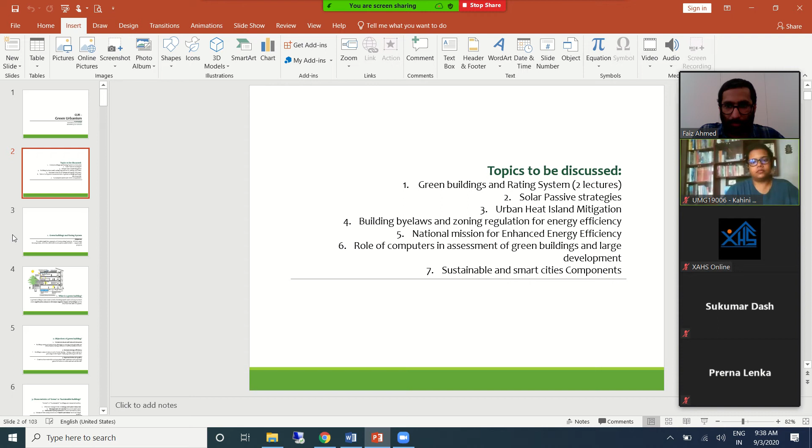Like I said last time, we'll be discussing some aspects of urban green or green urbanism, what are green buildings, and how this works from the perspective of urban scale, and how this rating system has to be understood. We were discussing Griha and LEED in this context, and today we'll see two more rating systems, and then move on to other topics like passive strategies and other interventions impacting the built environment. I have recorded last class's discussion as well, so at the end of the presentation I will share this presentation and both videos in case you need to browse through it. So let us quickly go to the topic.

These things we discussed. Now we'll go into the third component, that is BREEAM. I'm not expecting that you will remember everything we discussed last time, but at least you should have a broad understanding about the objective of this rating system and its main focus. The criteria and scoring system will vary depending on how it emerges, it's not fixed. So if they get a new idea today, they will probably add another criteria or point for it. Those things will keep changing, we can't help it, but we should understand the objective of Griha, how it's different from LEED, and what are the major components discussed in this rating system.

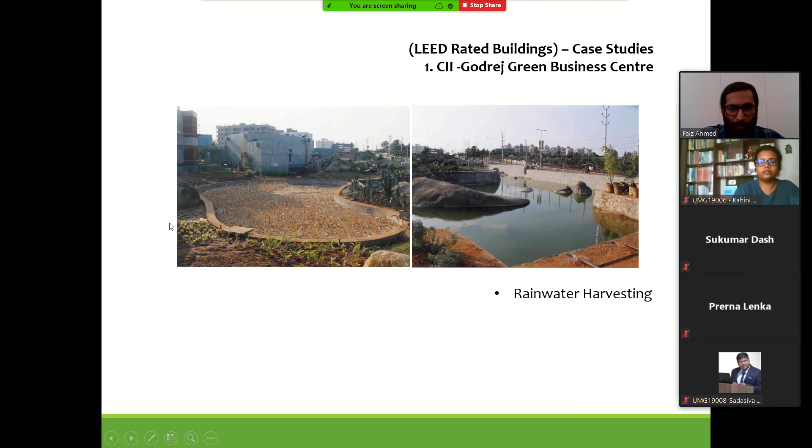So what we'll do today is we will start with BREEAM, and also discuss CASBEE, and we'll see overall what is common in all these four rating systems and what are the most important parameters.

BREEAM is Building Research Establishment Environmental Assessment Method. It's developed in the UK, and it's one of the oldest assessment systems that has been developed. It covers a range of building types, and like we said, for each rating system there are different criteria and modules applicable for buildings, large scale buildings, neighborhoods, or even cities. This is applicable to many different scales of project.

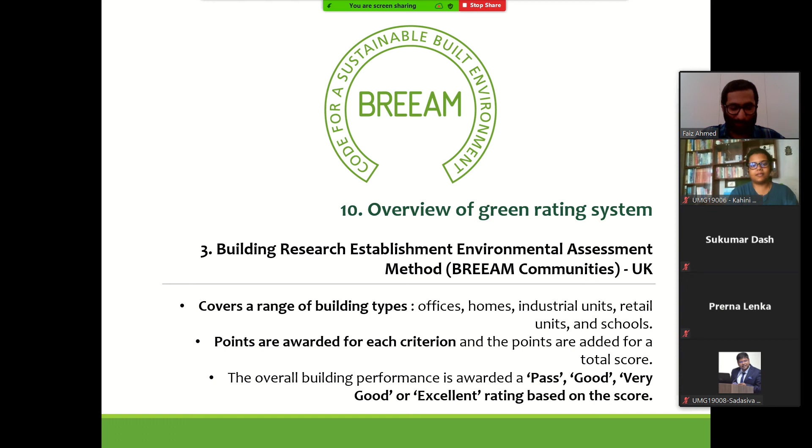Points are awarded for each criteria, and the points are added to total scores based on the performance of buildings on criterion set by the BREEAM agency. It will be assessed, and the overall building performance is awarded in terms of pass, good, very good, excellent rating. Like we have star rating, and we've seen in LEED, what was the system? In LEED also it is a star rating, or what was the system? I forgot, maybe at the end we'll summarize it again.

There are certain specific criteria mentioned in this BREEAM rating system. The major criteria under which the entire building or development will be assessed include management, in terms of overall management of the project. We'll go into sub parameters also, but I'm just highlighting it here so you have a fair understanding. Management of project, then energy - what steps are taken for conservation of energy, energy efficiency, and so on - and water resources.

From land use and ecological perspective, if you see in LEED there was a huge discussion on land use - how it impacts, how the building should be designed to have less impact on the surrounding, and the role of land use in that. Then health and well-being of the occupants - what parameters need to be discussed under this broad heading is also explored here. Then transport, which we've also seen in LEED, smart location was one of the major criteria used. Then material, which is common in all three we've seen so far. Waste, and pollution as well.

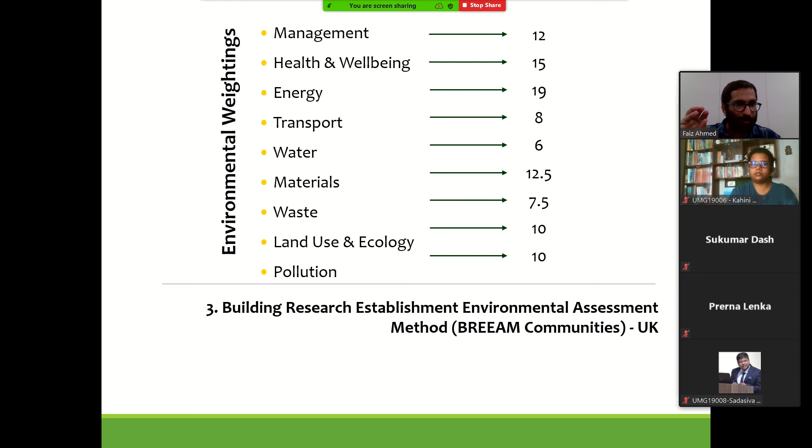Similarly, for health and well-being there is a score. The building can be assessed for a maximum of 15 points, something like that. This kind of weightage is not clearly given in Griha, but it is there actually. Some are optional, some are mandatory points, something like that.

How does it go? These are the parameters that we have already shown: management, health, energy, transport, material, waste, land use, and pollution. These are the major criteria.

It is passed through weightages. Not all criteria have equal weightage. These parameters have specific weightages. For example, like we said, energy has got higher weightage when compared to waste disposal. Accordingly the scores are arrived at for the building, and if they score 30%, this recognition is given.

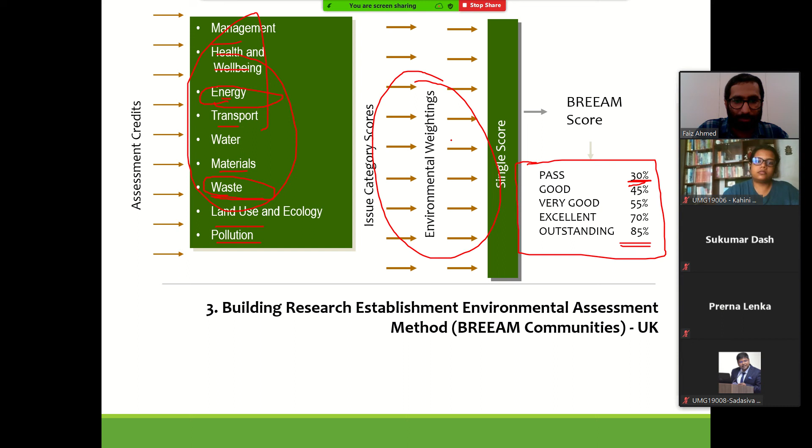It is a certified building. And if 85% of the points are achieved, then you get an outstanding score, something like that. This is not a big science, it's just an assessment criteria. We just have to know that this is how it is done.

We will go into a little bit of detail about what are the sub-criteria mentioned in all the major parameters. So the first one is management: commissioning period and process adopted, monitoring of commissioning, energy use, on-site activities, waste management, and pollution minimization.

This is done in the beginning of the project. So how the process of identifying suitable consultants and the transparency involved in all that is also a part of assessment in this case.

Then health and well-being: adequate ventilation, humidification, presence of controllable blinds, energy efficient lighting, thermal and visual comfort, and noise levels. So this will be assessed from a health and comfort perspective.

Actually, some of these things may be slightly higher, maybe from what you'd call intelligent building or smart building concepts, may be highlighted here. Since this is a UK system, these are devised based on their requirements. I hope you're able to understand what's being discussed: humidification, controllable blinds, energy efficiency, thermal, visual, and comfort.

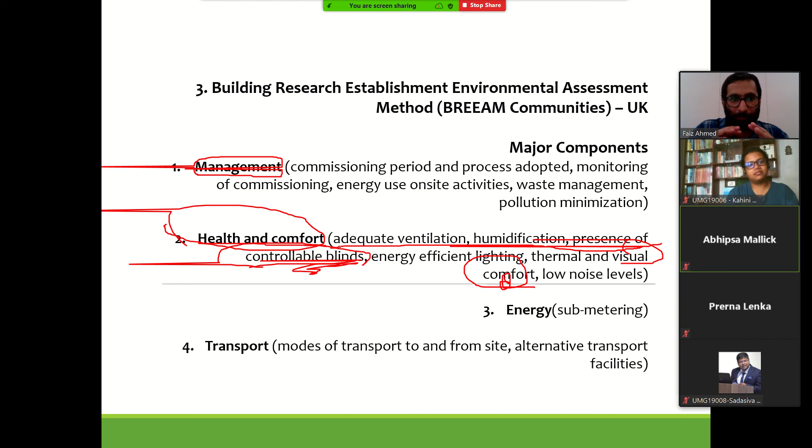If the environment is too quiet, that is also not feasible for us to be in. Let us say I'm here in this cabin, and if there is no sound of this laptop and no sound of this AC running and no noise from outside, I will not be comfortable actually. Our minds are not trained to be too quiet. Sometimes it happens that the building is far inside, and it is too quiet.

So at that time they deliberately create or add sound. For example, you must have seen in big malls or large spaces, music is always being played. That's one example of sound, white noise - deliberately creating sound so that we don't feel discomfort. That's also one of the things we should keep in mind.

Of course, energy. Energy and sub-metering is given here, actually that means at unit level. For example, from an energy efficiency perspective, people are not aware how much energy they consume for lighting, how much energy they consume for, let's say, if you have induction at home, how much you use it for cooking, how much you use it for water heating, and so on.

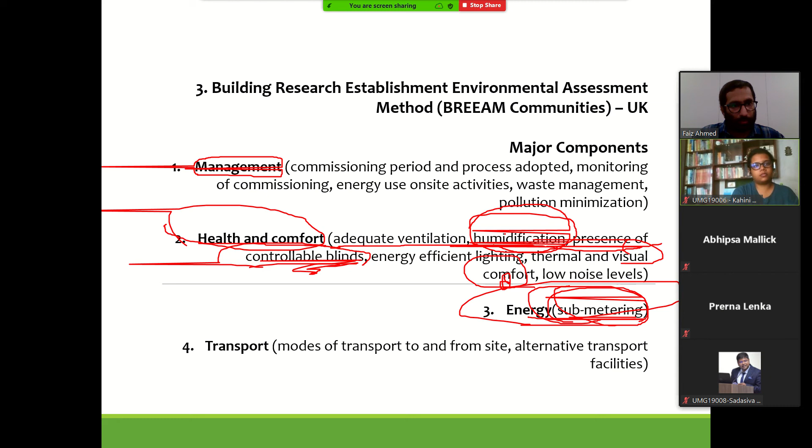Similarly, we have devices called humidifiers that add moisture to air. For example, the air cooler is also one device that adds moisture to air, which we can take as an example of a humidifier. When the air becomes too dry and saturated, that is also a problem for us - we'll have cough, dry throat, and all that. So we need to bring in some kind of moisture into the room, and a humidifier will help in bringing that.

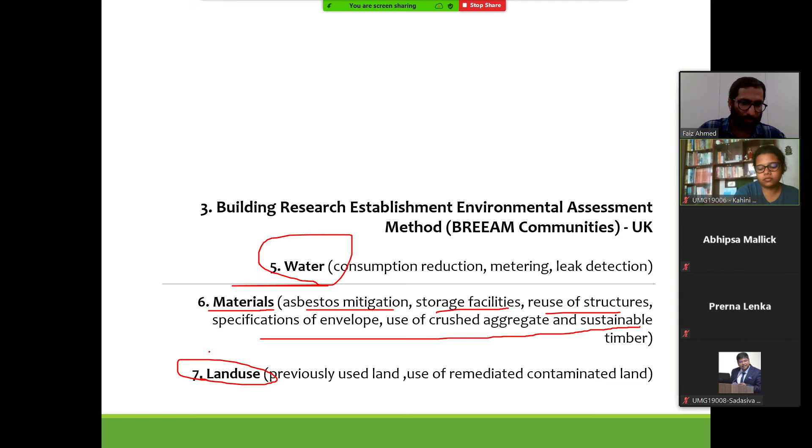Other components include water, and these are common things in all the rating systems. Materials - what kind of materials are used for mitigation, storage facility, reuse of structures, envelope design, all that - right from wall to roof, insulation, and so on. And of course, land use is also discussed, which is one of the important parameters in deciding a project.

Ecology - I think this was also discussed in other cases. Before selecting a site, we should do assessment, something called sensitivity analysis, where the land is assessed from an environmental perspective. And if you remember, in other systems we saw there are higher points for doing infill development, doing it on brownfield development. So these things are again discussed here.

Pollution - leakage system, on-site treatment, local renewable energy sources, lighting pollution design, avoiding use of ozone depletion materials, and so on and so forth.

Lighting pollution - can you give an example? Do you understand what lighting pollution is? How do we assess lighting pollution? We are talking about buildings. Too much light is also not required, and too much light will create glare, probably from an office design perspective. We don't need too much lighting. There is a prescribed lux level given for each activity - if we meet that requirement, that's sufficient. If we create more lighting, then we'll have more issues. Lighting pollution at that level will also be assessed. In fact, this is common in all the parameters.

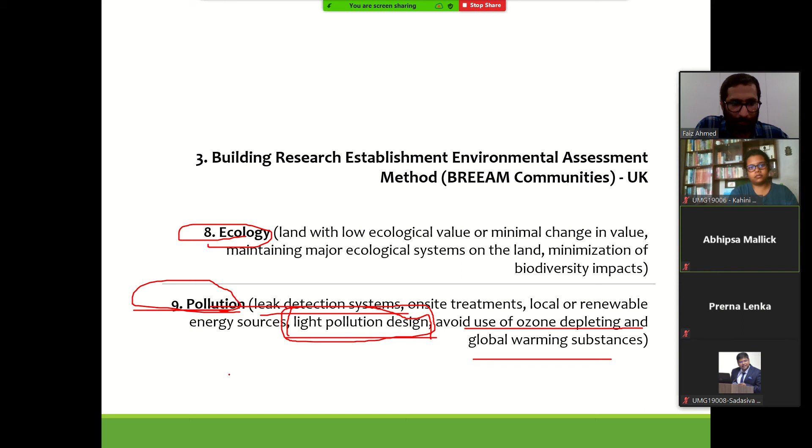Yes sir, yes, yes. Sorry. No, your voice is not clear, your voice is breaking actually. Yeah, yeah, can you speak? Say it again please. Yes, yes, yes, of course, that's what I'm also saying. Yeah, we can consider.

In fact, there are specific - I think this is not our subject, but just to give you a hint - lighting pollution can be looked into three ways. One is, of course, the amount of light coming from installed fixtures, street lights, and so on, and also the kind of barriers we use in streets. For example, if we have a two-lane street and vehicles are passing in both ways, we have a median.

If you have observed, these medians are treated through landscaping or through barriers. Why do we do that? Of course, one objective is so vehicles don't cross from one lane to another. The other objective is to avoid glare, the excess light from one lane disturbing vehicles on the other lane. Similarly, lighting pollution can also be discussed from a glare perspective - too much lighting.

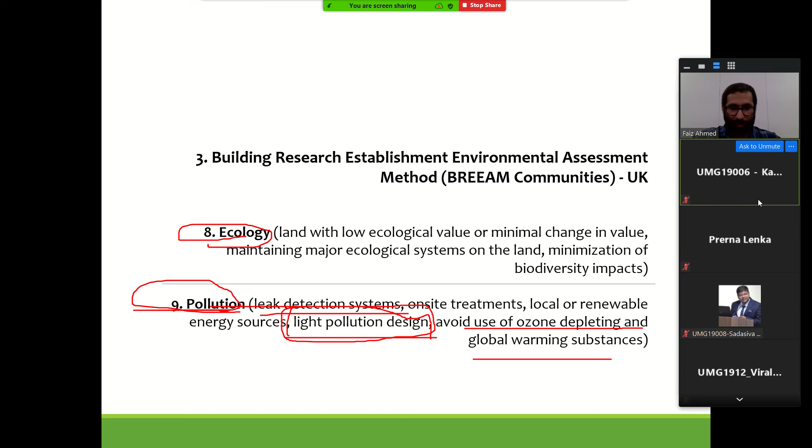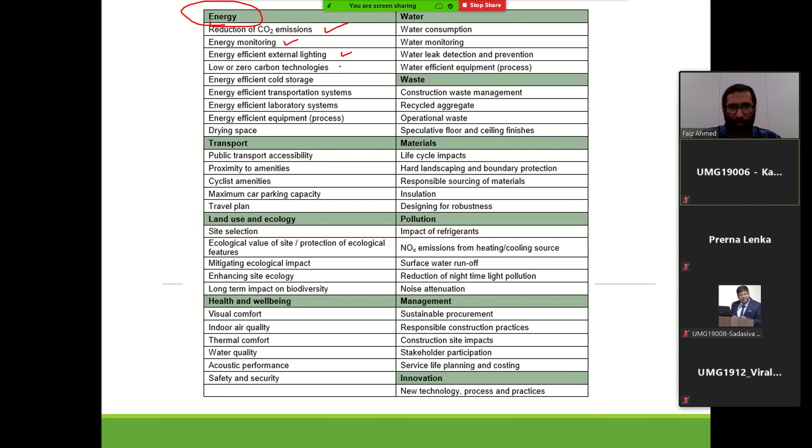So in summary, for example, under energy we have assessment for reduction of carbon dioxide, energy monitoring, energy efficient external lighting, low or zero carbon technologies, energy efficient cold storage, energy efficient transport system, laboratory system, equipment, drying space and so on. So under major criteria, there are specific sub-criteria mentioned in all these things.

All these things will be measured. For example, in health and well-being we have visual comfort, like I said. It's about lighting, both artificial and natural, indoor air quality, thermal comfort, water quality, acoustic. Acoustic is the sound environment inside a building. This is also actually a less spoken or less researched subject. Sound pollution - how do we assess it? Can we map the soundscape of a park?

There is one of my PhD scholars who has just submitted her PhD. Her work is on mapping soundscape - how do we define the soundscape of a park? How do we define the built environment, what are its characteristics? We can model it. Can we model the soundscape of a park or the soundscape of this room, and assess how sound impacts the end user?

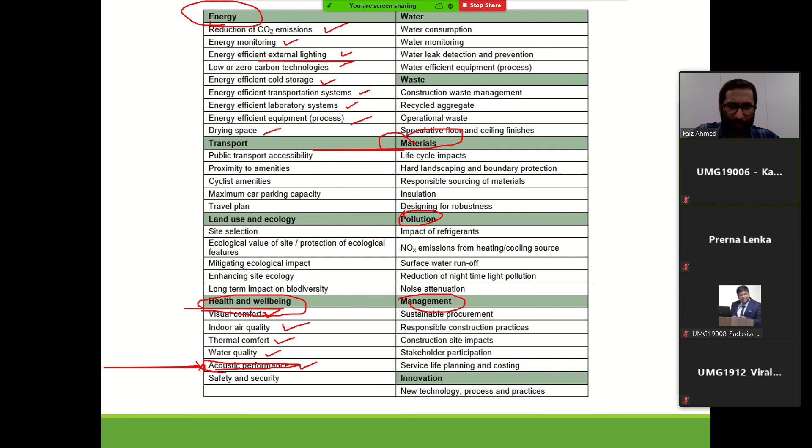So now there are a lot of advancements. So many things have been added into the assessment criteria. And of course, these are not qualitative assessments - many of the parameters and sub-parameters are quantitative assessments.

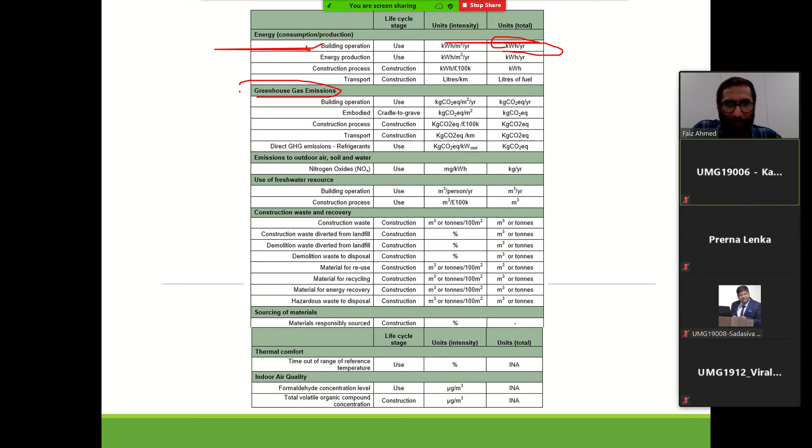For example, let's say building operation - how much kilowatt hour per year it uses, this is quantified. In terms of numbers, it is quantified. It's not a qualitative assessment, it's all quantitative assessment. For different parameters and aspects, different units are given, and how it has to be measured and recorded. This is an indicative assessment table for BREEAM.

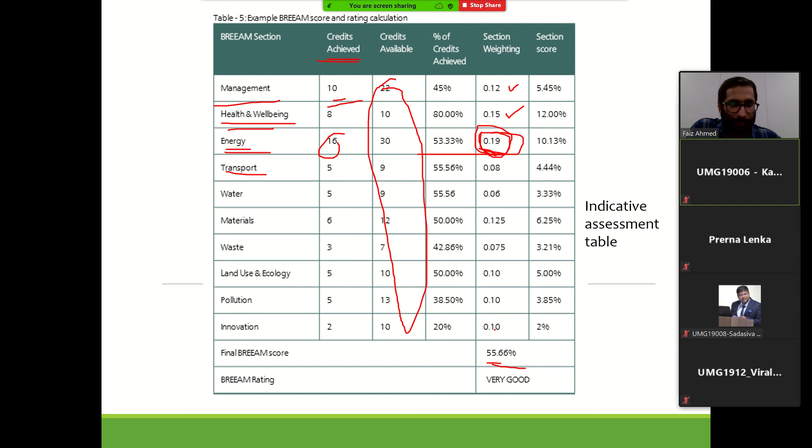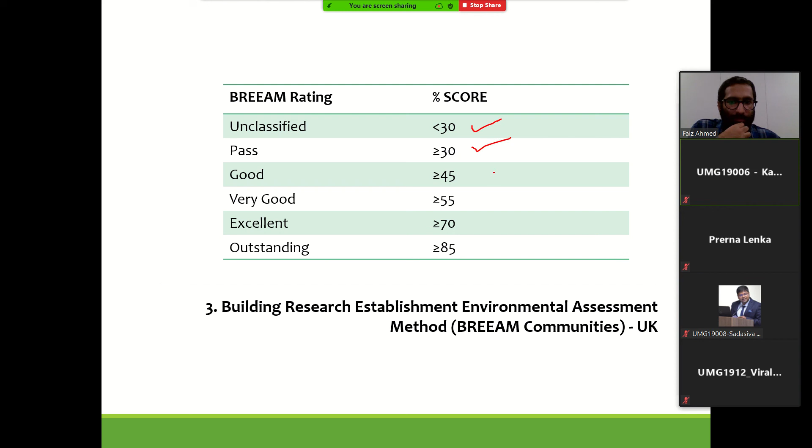And how is it assessed? Unclassified, just certified building if the percentage is less than 30, and pass, and very good, and so on and so forth, depending on the scores achieved.

And this is interesting - the BREEAM is interesting because it has been there for quite a long time. I think it is from 1990. So things have been refined, much refined, and clear objectives have been set. So there are certain things which are pre-design assessment.

For example, let's say appraisal - appraisal of the project and the objectives and so on and so forth. Design brief, in the sense what is the expectation of the client, and what is the need of that expected outcome of the project. So that is assessed, pre-assessed at this stage.

And there is something called design stage assessment, where the actual concept of the project, design development, and technical details of the proposals are assessed or evolved over a period of time.

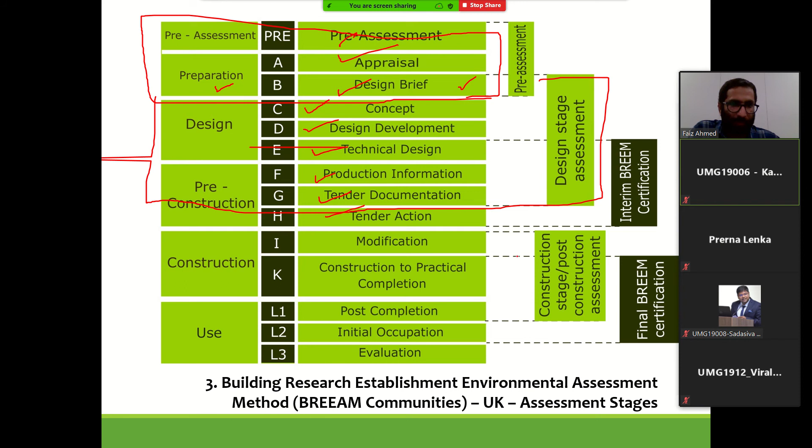And then pre-construction assessment is also done - production of information, tender documents, and actions regarding the tender document, all that has to be done. At this stage itself, an interim assessment or certification is done by BREEAM. So pre-assessment and design stage assessment - till here itself the project is assessed and an interim certificate is given.

And then during construction, what are the changes that have been brought in the actual construction, and other issues related to construction, up to practical completion - how much is actually built on site, how much deviation has occurred from the project - all that will be monitored and documented.

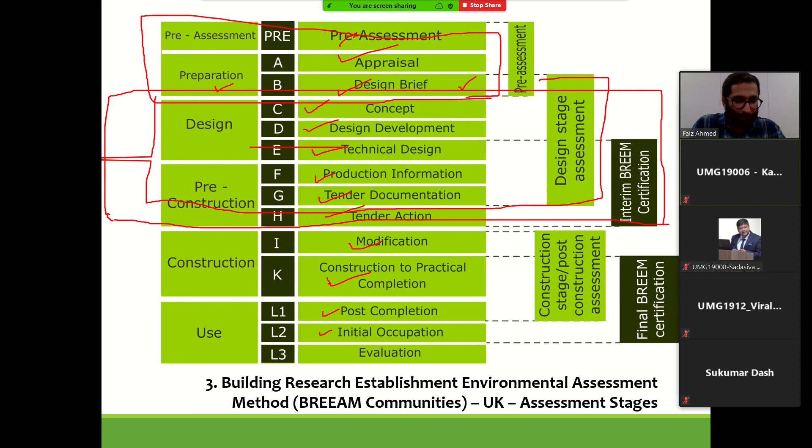There will be post-assessment as well, and final rating will be given based on the assessment. Post occupancy evaluation is one of the most important criteria we should keep in mind. It's not that this is only discussed at the design stage. After construction, the project is assessed to check how much actual deviation has occurred, or whether it is really performing the way it is supposed to. Otherwise, whatever the client or client's consultant submits as a performance report will just act as evidence for the building's performance, which is not actually the case.

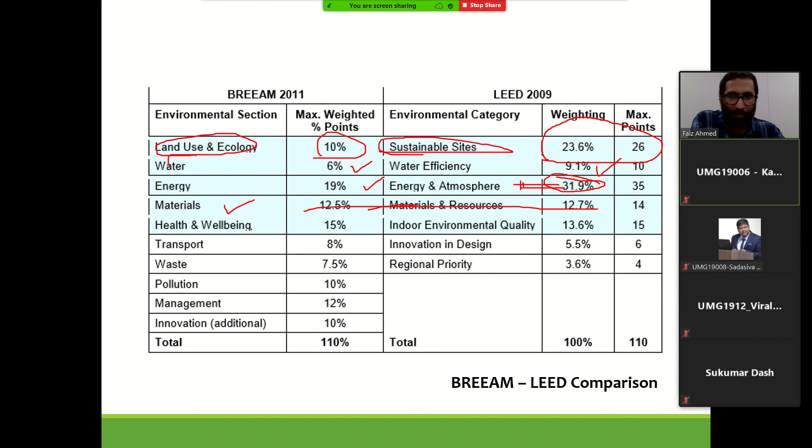If you see the comparison, land use ecology in BREEAM is there, and there's something called sustainable sites. If you see the weightage, 10% is given in BREEAM, whereas we have seen extensive importance given to land use elsewhere. Water efficiency is 6% in one and 9% weightage in the other. Energy is given 19% here, whereas 31% is focused on energy in the other system. So this is a huge difference, that's why a lot of new technological development has occurred from this perspective. Material gets almost the same weightage in both cases. Health and well-being is also almost the same weightage. Then transport, and then we have wastage.

There are other things discussed in BREEAM which are actually indirectly assessed inside it, but not explicitly assessed. For example, pollution management of the project and innovation are not actually explicitly discussed here.

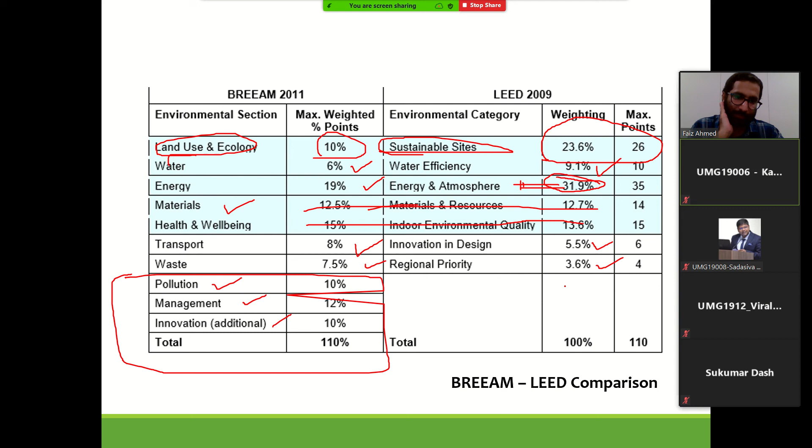I have not put any case study for BREEAM because so many things can be covered. I have given a link where you can go and see some case studies from the official BREEAM site itself, to look at how BREEAM works and how assessment is carried out.

That was BREEAM, and now we see the last rating system, CASBEE. Please remember BREEAM is from the UK. You may ask why these things are important. Suppose you want to work in the UK, Japan, the US, or the Middle East - if you are interested in this subject and want to be a consultant in these lines, you need to master the specific rating system so you are aware of the kind of rating system in practice in that particular locality, and you will also be certified.

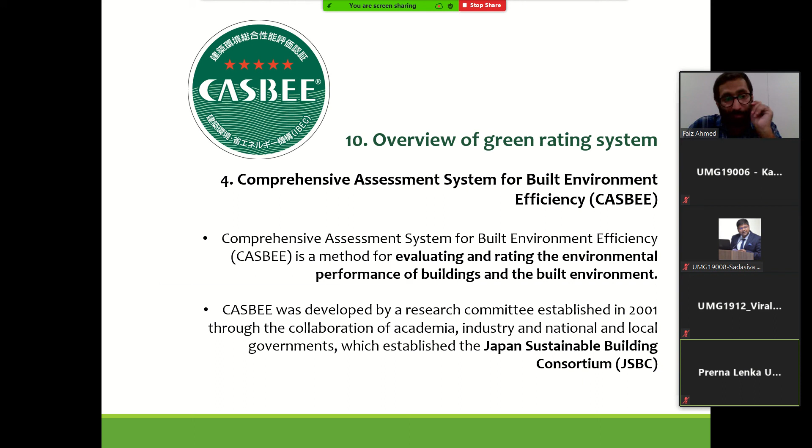The last rating system we will discuss under this topic is CASBEE, which is Comprehensive Assessment System for Built Environment Efficiency. CASBEE is a method for evaluating and rating the environmental performance of buildings and the built environment. Two words are mentioned here: evaluating or rating the environmental performance of the building and the built environment. So far what we have seen is exclusively the building alone, and maybe to some side.

Here, specific assessment will be done on how the building is actually impacting the immediate surroundings, and the performance of the building - both are equally important here.

CASBEE was developed by a research committee established in 2001 through collaboration of academia, industry, and national and local governments, which established the Japan Sustainable Building Consortium, JSBC. I have put up one very interesting case study of a building rated under CASBEE. All this information you can find through JSBC - online you can log in and find out which buildings are rated, how it is rated, what the parameters are, and so on and so forth.

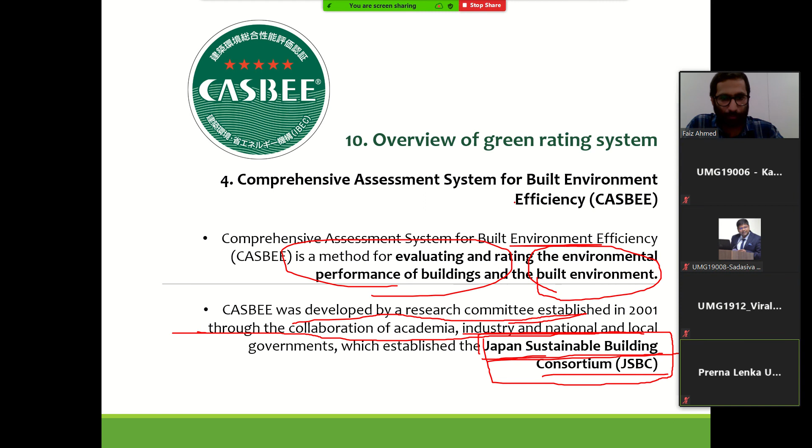CASBEE is divided into four assessment tools. The first assessment tool is about pre-design, the second is about new construction, the third is about existing building, and the fourth is about renovation. It's given part by part.

If the project has to be assessed for pre-design, there's a specific tool, and I think there is one supplementary Excel file where you have to feed the information to generate the results.

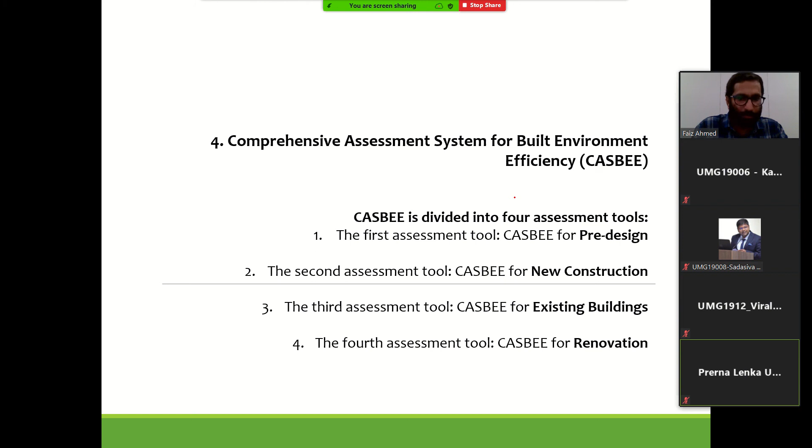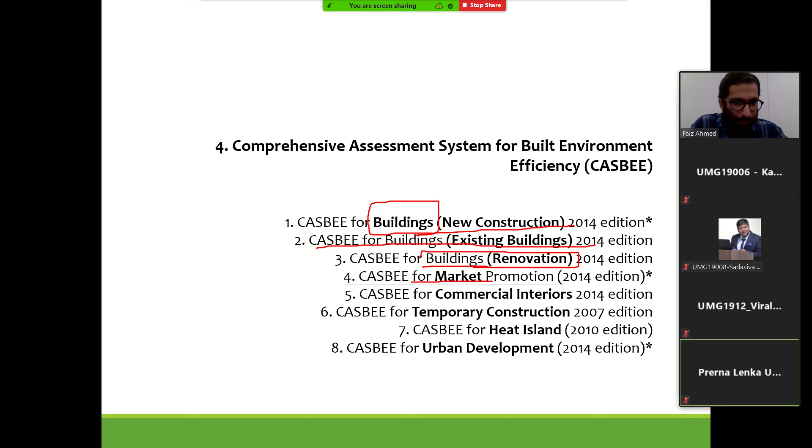For each stage or category there is one specific tool given, and unlike other tools which generally say this tool is applicable for small scale projects, large scale projects, or commercial projects, here specific building typology has been evolved. For example, CASBEE for new construction is generic, CASBEE for existing building, CASBEE for renovation, CASBEE tool for market, for commercial interiors, for temporary construction, for heat island, for urban development, for cities - this is evolving actually, it's not holistic.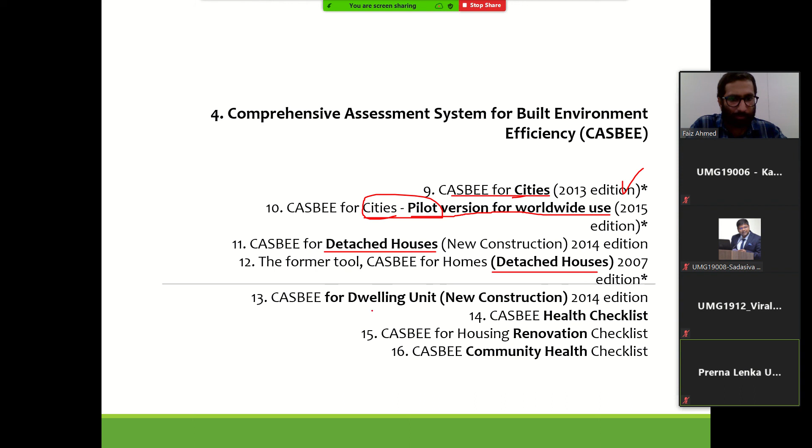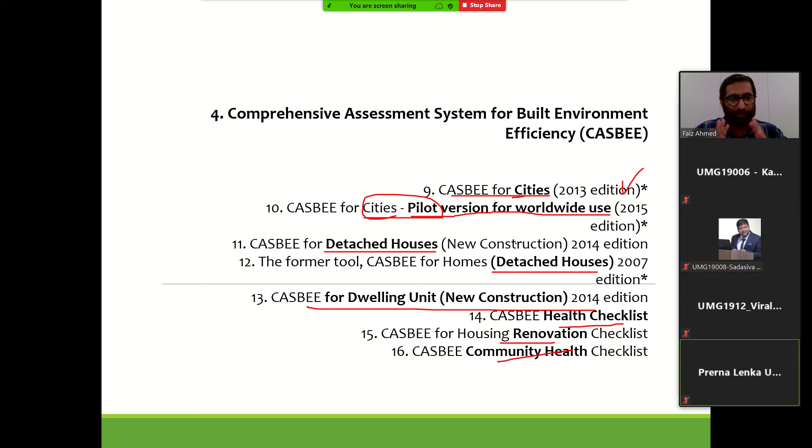Pilot version for worldwide use is also for cities, there has been evolving actually, and CASBEE for detached house, and there was one old tool also, CASBEE for new construction of dwellings, health check, renovation, community. So depending on the typology of the project and the use, specific tools are there, so that to have some more explicit assessment about the performance of the building.

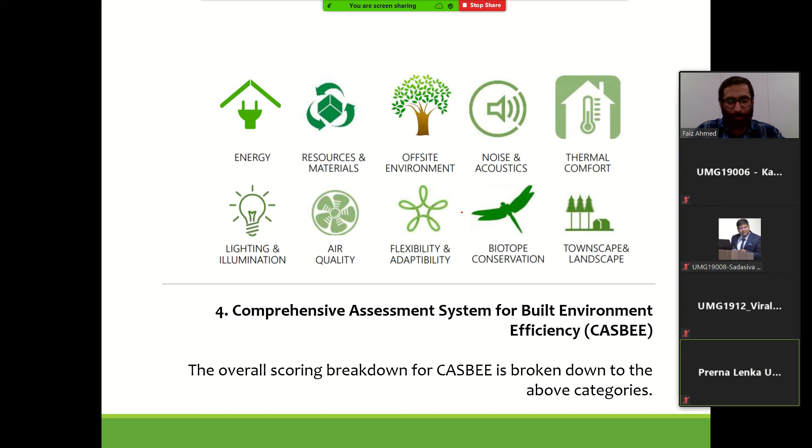So how is it assessed? Like other rating systems, this also assesses parameters including energy, resource and materials, and then we have offsite environment. These are some of the new things we will discuss in little detail how it is done. Noise and acoustics, thermal comfort, lighting and illumination level, air quality, flexibility and adaptability.

Biotope conservation, so conservation of fauna and of course flora as well, townscape and landscape. The overall scoring is done based on these critical parameters.

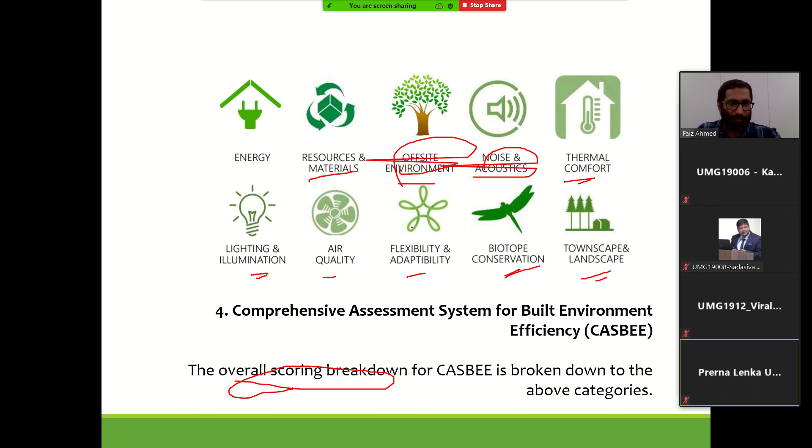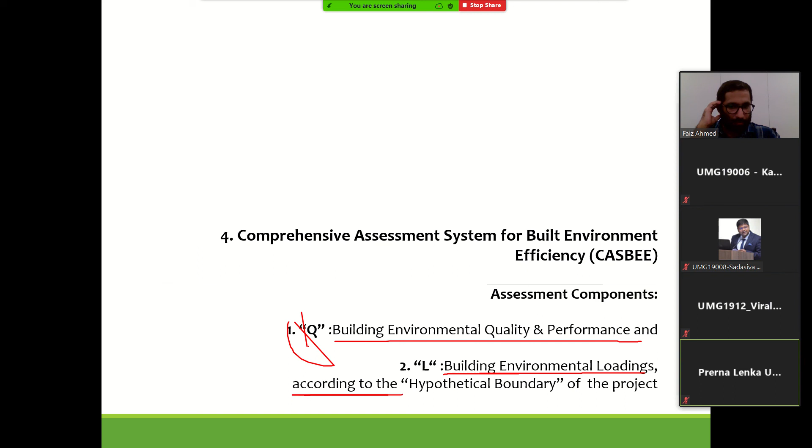So assessment is actually divided into two components. One is called Q, where building environmental quality and performance is one component. Then building environmental loading, according to a hypothetical boundary of project. Let me explain through this diagram.

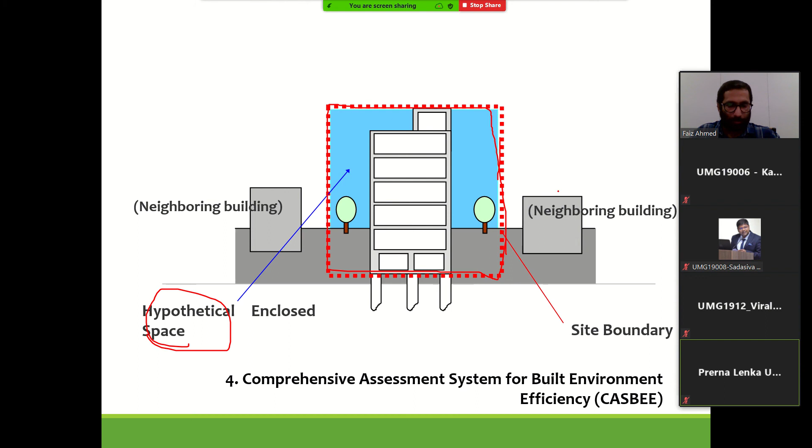Let us assume that this is the building that we are analyzing, and this is the site extent of this building, which they define as the building's environment, immediate environment, hypothetical space enclosing the building, and these are its neighboring buildings. Q is the assessment category as a positive impact inside the boundary.

Because of this, and also because of the interventions at the site level, the quality of this environment is defined, what are the positive aspects of putting this building in place, and the negative impact is also assessed. For example, emission of air pollutants, noise, heat, etc., soil, water and waste pollutants outside the site, resource consumption and CO2 emission and so on.

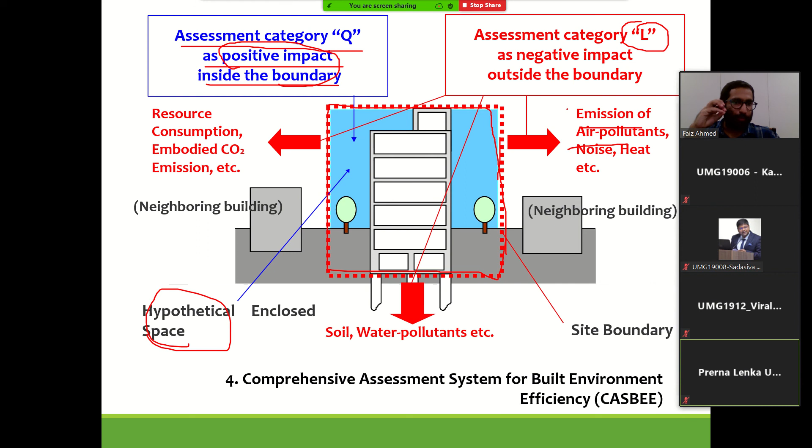All these are termed as L, the negative impact of putting this building into place. So to analyze and understand this: because of this building, what is the positive environment created within this site, within this micro environment, is one component. The negative impact of this building on outside the site, these are outside the site.

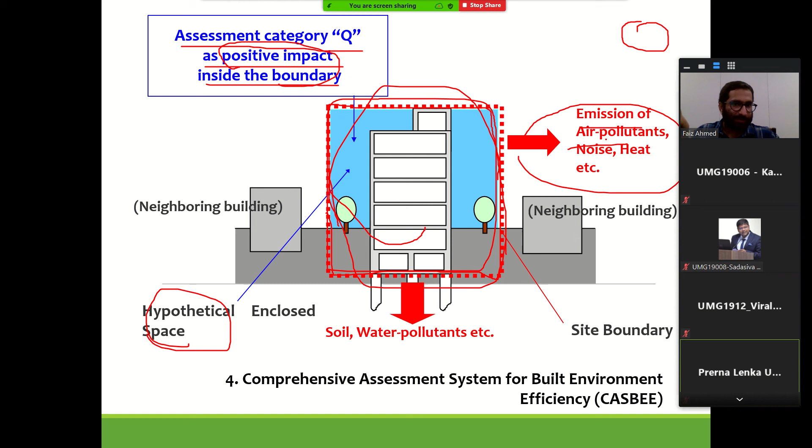The buildings are not exclusive, right? It will have an impact on the other case as well. For example, in fact, we have been discussing that green buildings will have a better performance, less impact on the surrounding, or less impact on the environment.

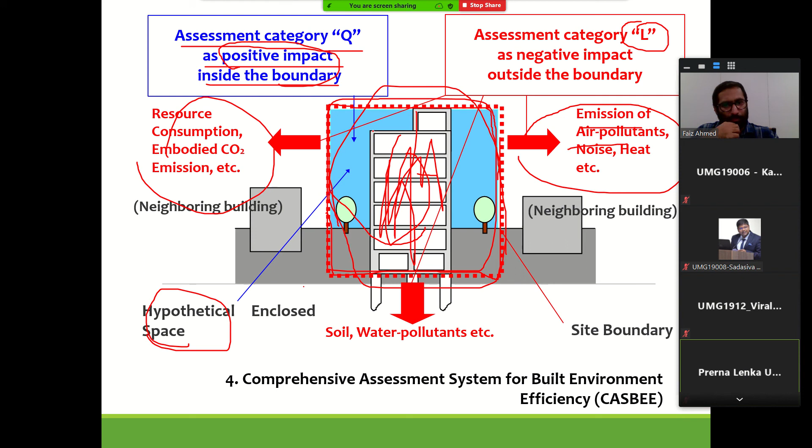There was one study done in our campus. We tried to assess the negative impact of this. Let us assume that this is a green building, designed as a green building, and we were trying to assess the negative impact of this green building on its immediate surrounding, similar to this.

Any building will have an impact, but it should be less, it should be minimum. That's the whole intent. We cannot have zero impact buildings. There's nothing like that. As soon as we build something, we are disturbing the natural fabric. But the intent is how do we bring down the impact, which is what we are all discussing now from the lens of sustainability or green urbanism and so on.

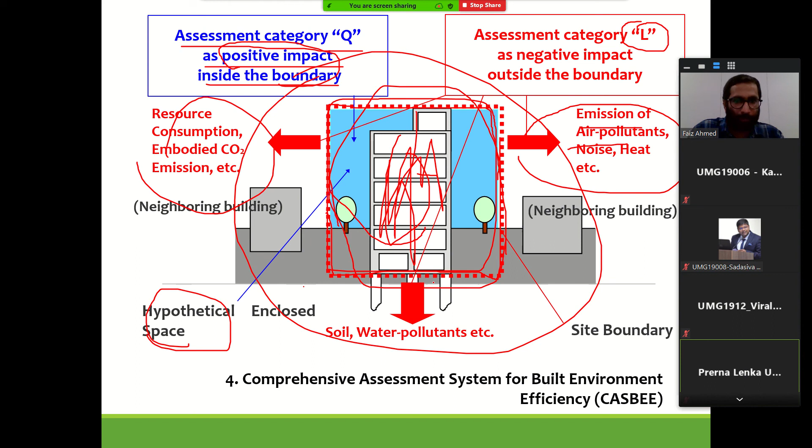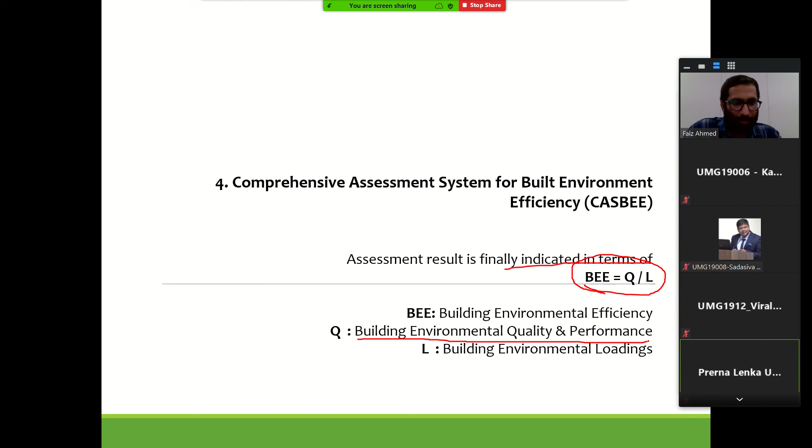So the assessment result is finally indicated in terms of building environmental efficiency, which is equal to building environmental quality performance divided by building environmental loading. This is assessed from majorly 4 aspects: energy efficiency, resource efficiency, local environment and indoor environment. The scorecard is arrived at like this.

Project description is given, and each assessment shows how each parameter is performing, and what score the particular building has achieved. All that will be shown in this automated tool, and how much score is generated.

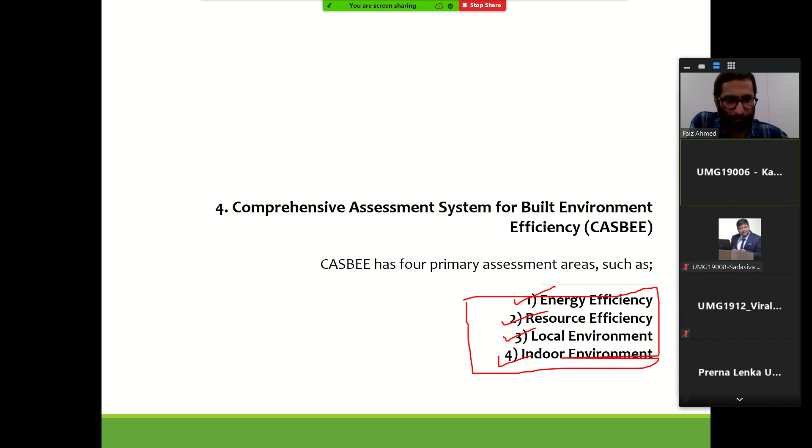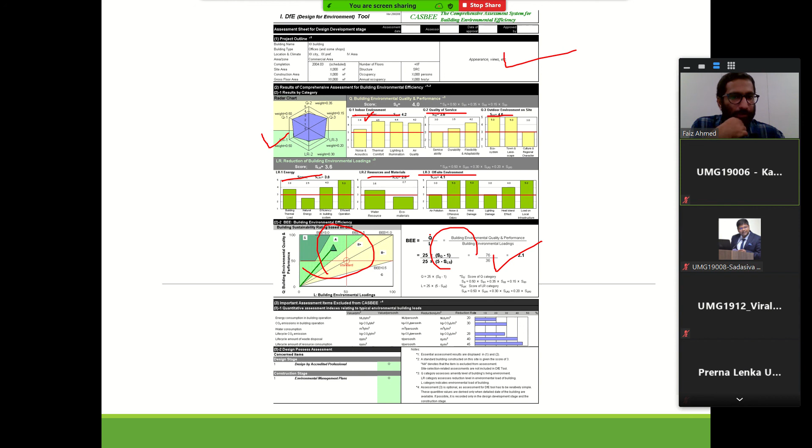These are auto-generated ones. So once we feed the information, we will be able to generate this kind of report. This will be the final scorecard or sheet, and based on this, the assessment is given.

I have put one case study for this because I felt this is very interesting, and there are new concepts being discussed here. So probably this will lead to the next topic that we'll be discussing in the next class. I thought we can have a brief introduction on this so that we can proceed and take the discussion further in the next class as well. So this is one research institute in Tokyo.

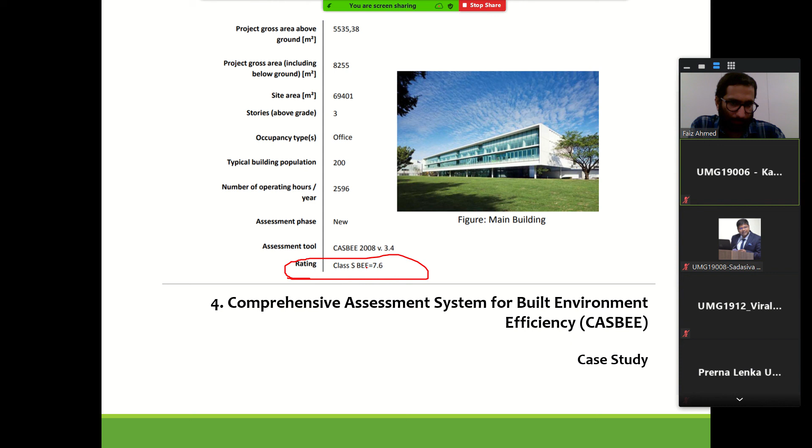And it is CASBEE rated building, and we'll see what are the major initiatives taken in this particular project, and how it is assessed.

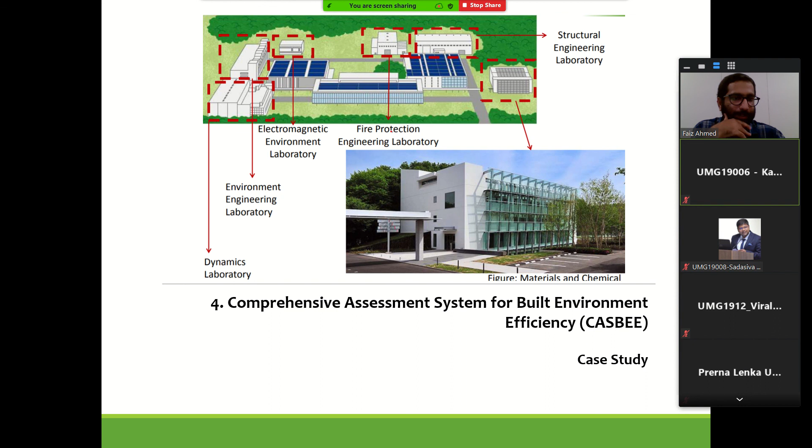So actually this is a large complex building with multiple buildings. Some of the important criteria, initiatives, or strategies used in this building is the ecological roof system.

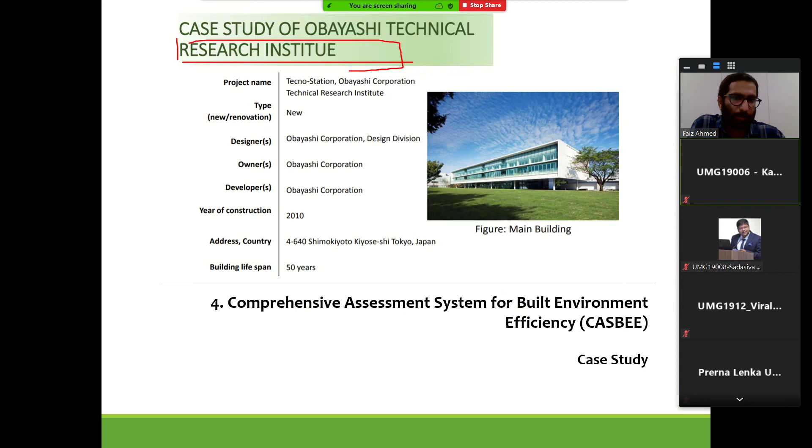This is how we compile the assessment report. It is not that you just feed in numbers and the assessment is done. No, each component has to be assessed in a specific manner, and details have to be developed. For example, let us say for on-site power generation, what are the criteria, what are the initiatives that have been taken?

Here, solar panels are installed on the entire roof of the system for generating electricity, for running the building.

Natural light by reflection of indirect lighting. Specific designs are done so that the light does not directly enter the building; we have reflected light. Light falls on the surface and then we get reflected lights. This is direct light, where the light is directly passing into the working environment. At the same time we have reflected lights coming in. These are specially designed, and you can see the sections as well, at specific modules this has been done, so that the lighting is also taken care of.

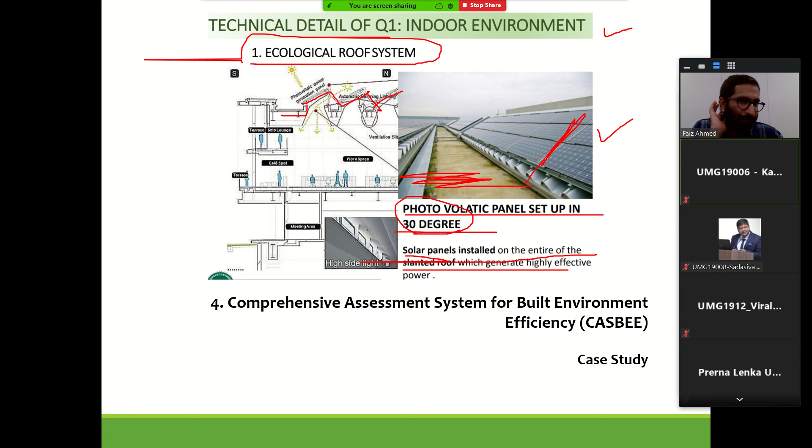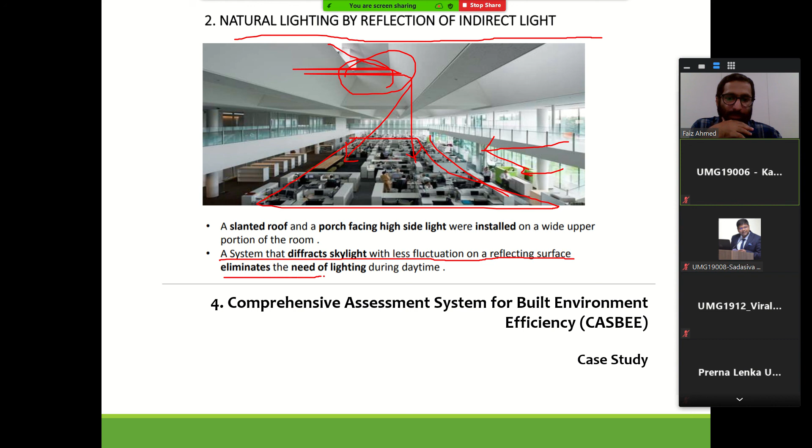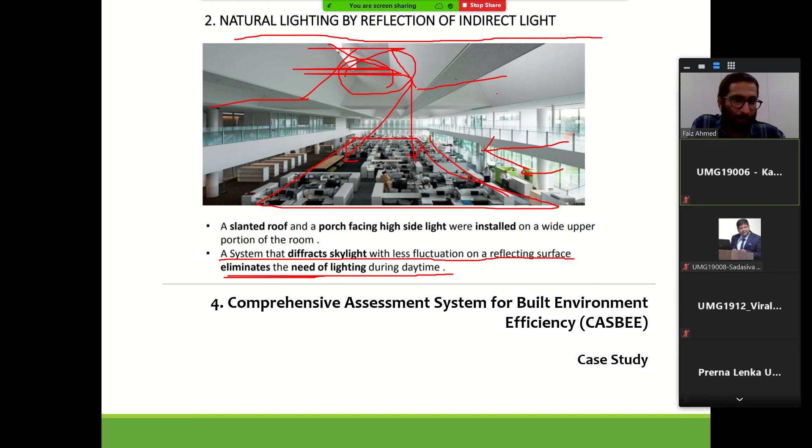At the same time, the solar panels are not laid flat like this. They have to be laid at a specific angle based on the latitude and longitude, based on the location of the project. That has been taken care of, and integrated with the daylighting system as well. This is a system that diffracts skylight with less fluctuation on the reflecting surface, eliminating the need for lighting during daytime. This is one initiative, and of course this has to come from the building side. No consultant will give this idea, only an architect can do this.

The second one is the peri-buffer system. Peri-buffer system is, for example, certain buffers you can say balconies are created. Why do we do that? So that the heat is reduced or minimized and absorbed in this area, so that lesser heat enters into the actual working area. A thermal buffer zone established around the window reduces the air conditioning load.

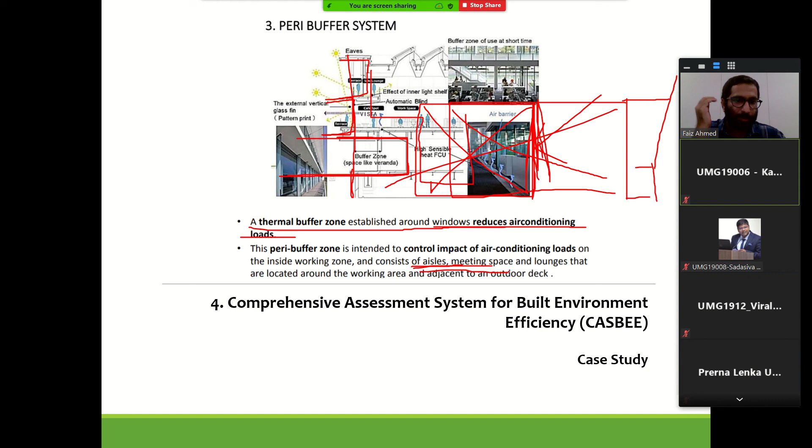Suppose the building is like this, and this is the external wall. We get direct sunlight, and the amount of air conditioning required to cool this space will be much higher than if you have a buffer. You have a buffer and you reduce the heat coming in, and then this is your heating or cooling area. This area may require a little lesser cooling load than having an external direct wall. So there are specific corridors and aisles created around the building, so that the cooling energy demand is reduced by design. That's one thing that has been done.

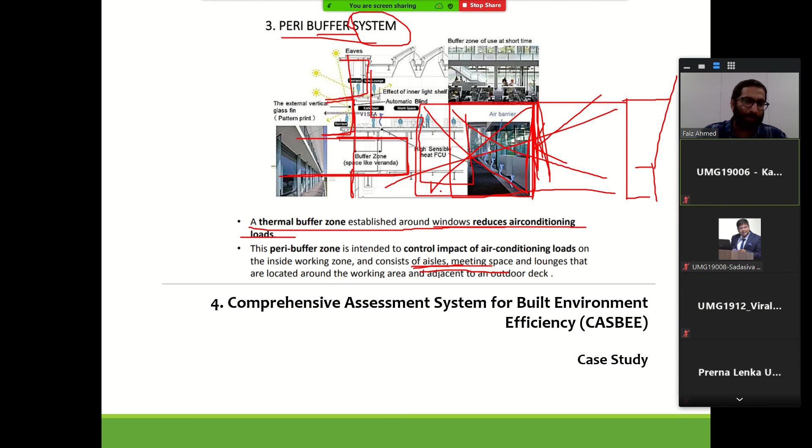The peri-buffer system is used. There is no system here actually; system in a sense, the design of the layouts, how it is done.

Then, displacement natural ventilation system. We've also seen the technique for getting daylight into the space. At the same time, in HVAC systems you must have read about displacement ventilation. Displacement ventilation is where you have X amount of air in this space that has to be replaced by Y amount of air, and how much time it takes for the system to do this depends on the efficiency of the system in place.

So when outside air meets the predetermined condition, the air conditioner is stopped automatically, and the air is discharged from the high side light on the upper building. If you understand how the physics of heat works, the hot air is above. Let us assume this is a building section, and we have an X volume of air in this room.

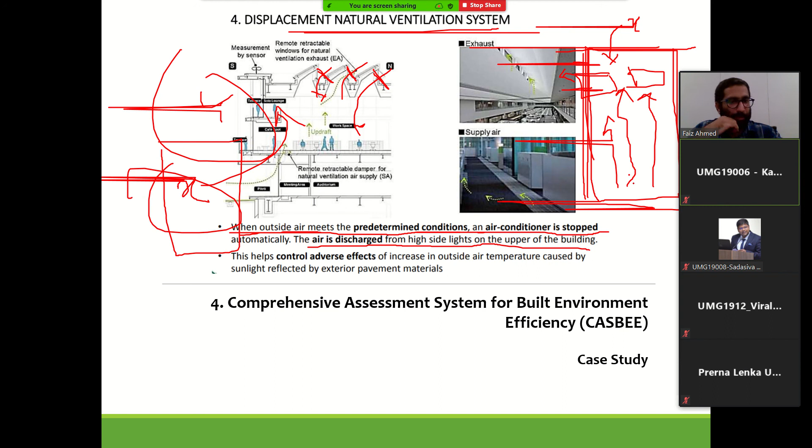The air will be different. To put things simply, hot air rises up - this is basic physics. If you have seen old houses in warm and humid climates, in most Indian cases, you will see a clerestory window on top, maybe a small ventilator at every level, higher up. That is basic science: hot air rises and finds vents to leave the building.

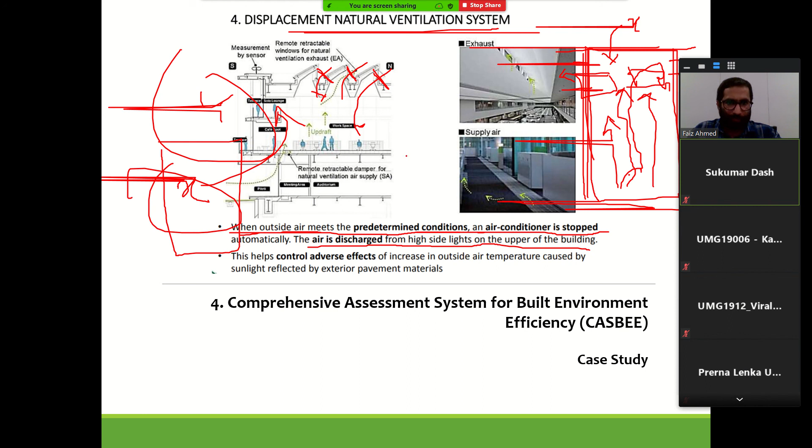So that same concept is used here to displace the air. They have also used other sensors - motion sensors and occupant sensors - for example, task-based lighting, task-based cooling systems, or sensor-based cooling systems. Also personalized air conditioning using radiative, convective, task-based systems. These are very high-level technological interventions used in the building.

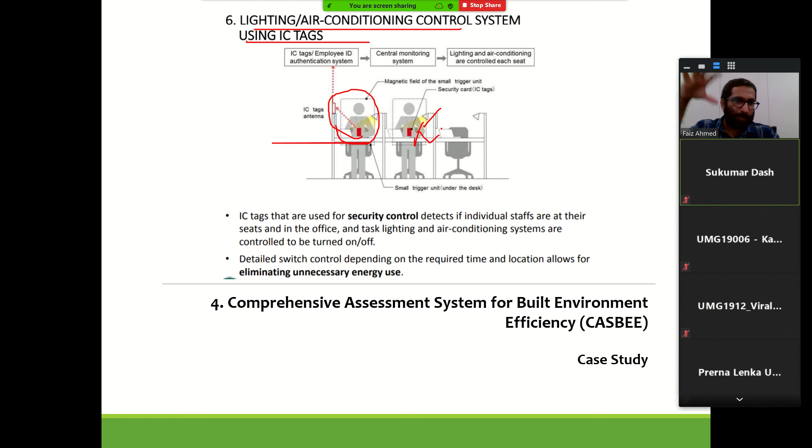Lighting, again, is now fairly common - you have probably seen in cinema halls and shopping areas that lights turn on only if you are there. So sensor-based lighting, smart lighting systems are used. In fact, they have gone further to task-based lighting systems - the same concept used at macro level has been applied at a very detailed micro level as well.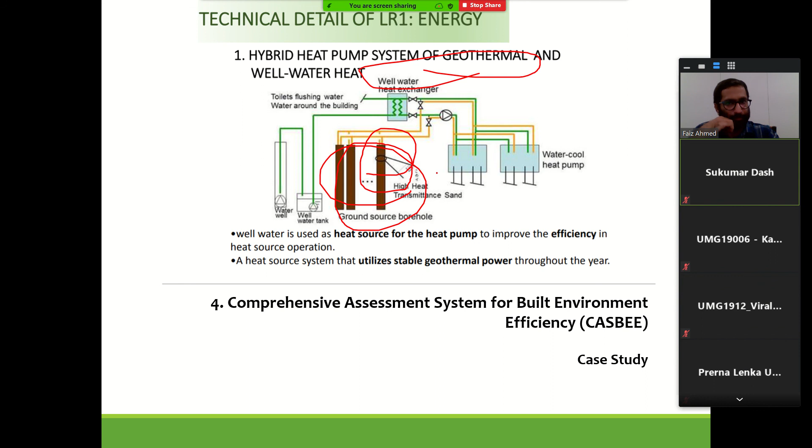And they have done some innovative work in energy production as well. So far we have seen energy production using renewable energy from the sun, but they have also used geothermal energy for running the building.

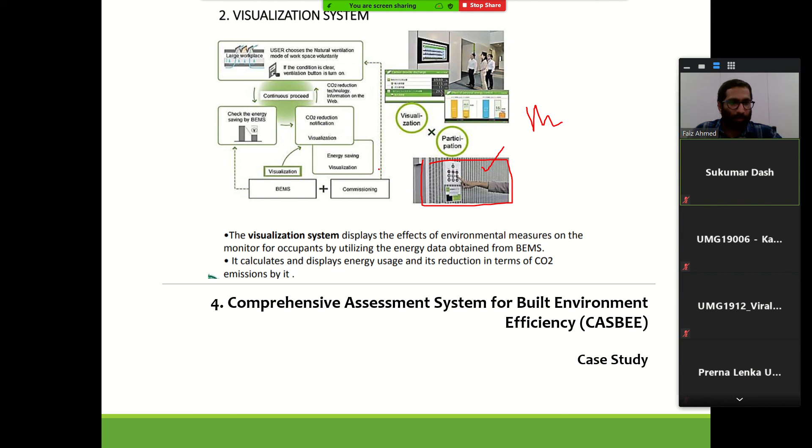And for visualization, like I told you in the previous BREEAM case, there's something called energy metering - we can visualize how much a particular equipment is using, what its contribution and impact is. It's like an app or a smart gadget system installed in different components, so we know how much water or heat is being produced, or how much CO2 emission it is producing to the environment. All this is a smart information system assigned to specific building and site components.

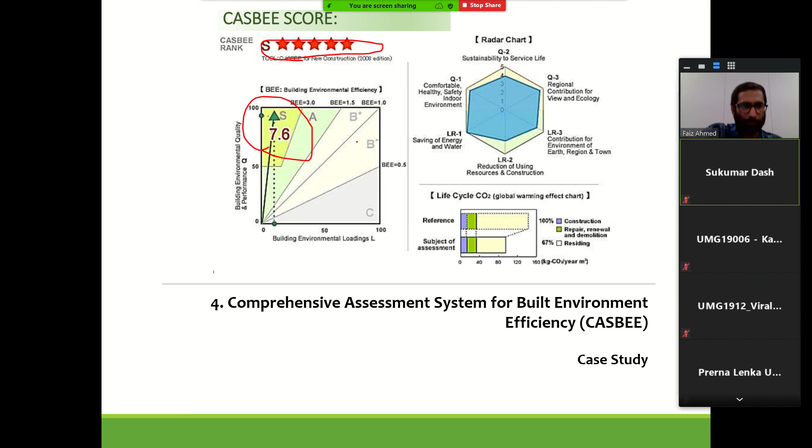So to summarize things, I have put all four rating systems together so we can quickly go through the major concepts discussed and how each one differs from the other: CASBEE, BREEAM, LEED, and GRIHA. If you look at papers and worldwide usage, these are the commonly used rating systems, which is why I used them. There are many other rating systems as well - maybe after this presentation I'll show you a list of them. There are some 30-35 rating systems in total.

BREEAM is one of the oldest. LEED and CASBEE - we have seen where it originated. Some parameters are specific to a country, while some tools are developed keeping the entire world into consideration. For example, GRIHA is only for India and doesn't rate buildings in any other country, whereas LEED is US-based but we use it here. BREEAM too - I don't know if any buildings in India have been rated with it, but the tool is designed so it can be used anywhere in the world.

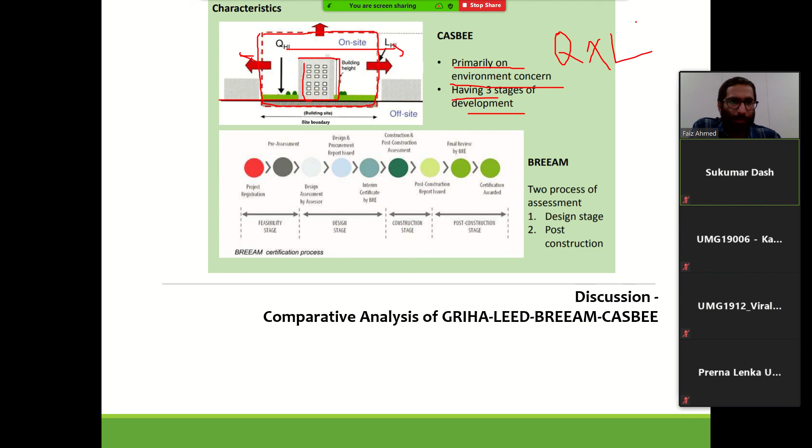What is the major difference between CASBEE and BREEAM? CASBEE primarily focuses on environmental concern, having 3 stages of development. We have seen the impact of the building within the site as one component - that's Q - and its impact on the outside environment, which is L - the impact this particular development creates on the immediate environment. That's the major thing to know.

BREEAM's difference is that it's a two-stage process - a stage-wise assessment. Design stage assessment is one, and post-construction stage assessment is another. At the feasibility stage, a pre-assessment is done, and during design, the design is evaluated - an interim report or interim certification is given at this stage. So pre-design comes first, then design stage where drawings and ideas are in place, at which point one assessment is done, and the rest of the component is based on post-construction.

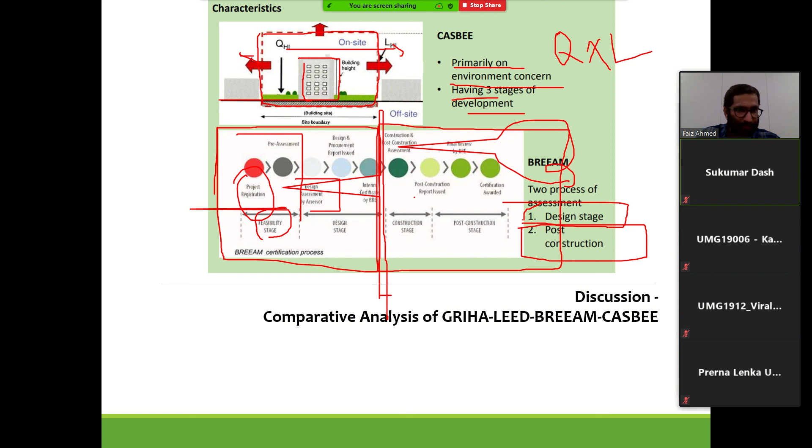Okay, how is it performing during construction, what are the challenges that the project is facing, all that.

LEED, like GRIHA, is a voluntary tool constituted of 5 sustainability areas, an industrial standard certification process. It's a holistic approach. You have majorly 5 criteria used for rating a building under LEED: sustainable sites, water efficiency, energy and atmosphere, material and resources, environmental quality, and innovation in the project.

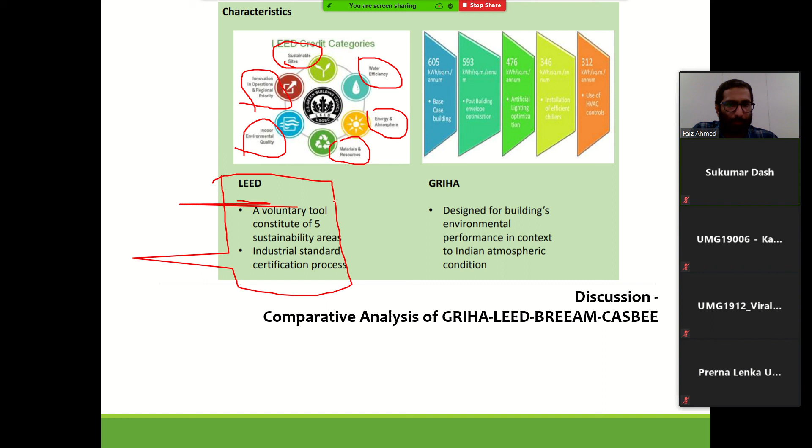Okay, this is how LEED works, with 5 major parameters. How GRIHA works is a little different. GRIHA is designed for buildings, evaluating building environmental performance in the context of Indian climatic conditions.

GRIHA is a little different. What we have to do in GRIHA is create a base case. If you listen to any seminars on GRIHA, they will always refer to base case. What is a base case? For example, let's say you are designing an office building, and you are aiming to get this rated by GRIHA. What you have to do is actually design it the way you intend to.

You design this without using any passive or active system to improve the performance of the building. You conventionally design this building, and then you estimate the total energy it will consume, without intentionally creating any new strategies, passive or active, in the building.

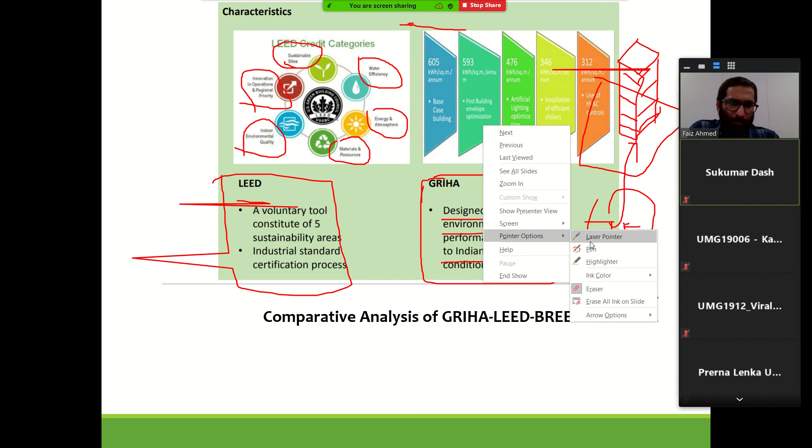And then you arrive at the energy that it will consume at the end of the day. So that will become your base case. For example, this is a hypothetical one - just a minute, let me erase this. Let us assume the base case consumes 600 odd kilowatt hours per meter square annually.

And then you intervene in this building by introducing specific high performance material or design initiatives to reduce this number. That's the idea - post building envelope optimization. Let's say you have designed this building and now you optimize this envelope to improve its performance. From 600 you have got 590, and then you introduce artificial lighting optimization.

This is just an example; it's not necessary that the steps have to be only this - this is an indication. You can see there is a drastic reduction in overall energy performance: from 590, the envelope gave you about 15 odd kilowatt hours per meter square reduction, and using specific lighting you can save so much. Then using efficient chillers and other systems, you can bring this energy down further.

Use of HVAC control, zone-based air conditioning - the energy can be reduced further. So the idea is you design a building, run the simulation, and create a base case. From the base case, all the measures are done one after the other, and you bring down the total energy consumption. That's how GRIHA works.

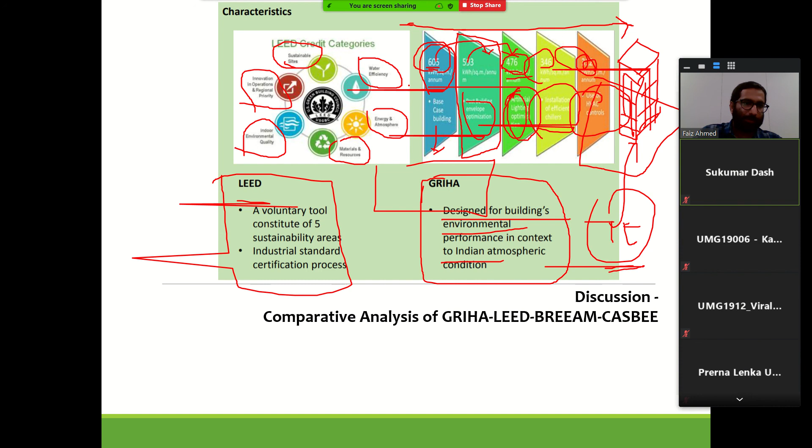Whereas the other systems are a little different. I hope it is clear for everyone. The major criteria used in all this - we have seen this in detail, but to summarize: built environmental quality, indoor environment and quality of services under CASBEE, built environment load - you remember this? There are two things: inside the site and outside the site. What is the impact outside the site? That's one thing. Under BREEAM, you have management, health, energy, water, material, transport, waste, land use, and so forth.

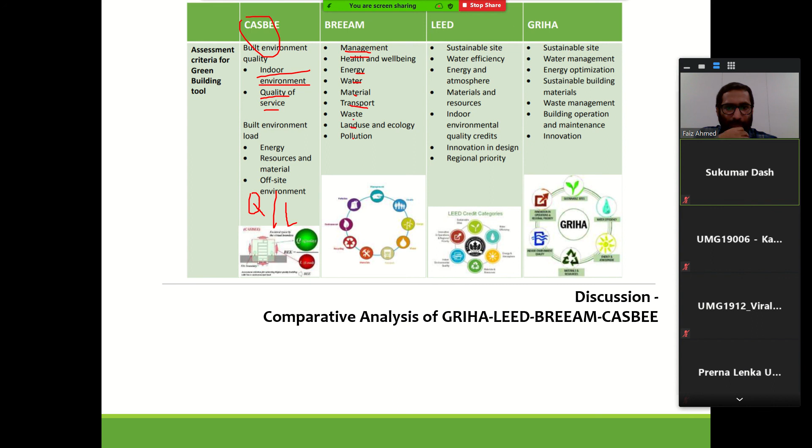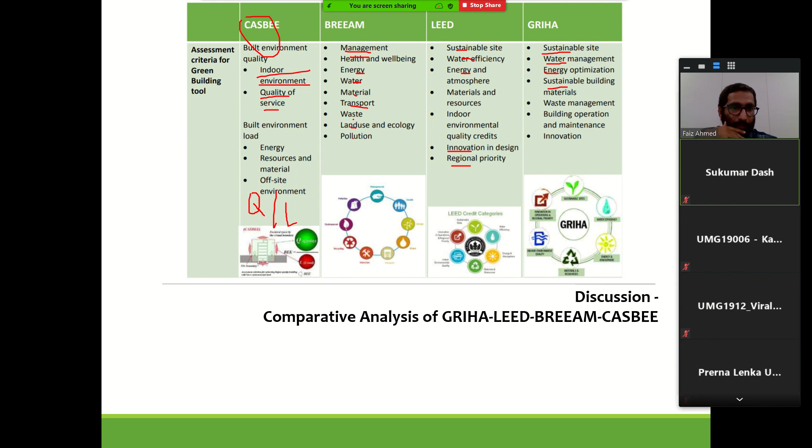Under LEED, we have sustainable site, water - most of it will be overlapping. One or two will be new that we should keep in mind. Sustainable site is there throughout. Water, energy, sustainable building material, waste, innovation is also there.

And the results are depicted in a graphical manner. Under CASBEE, we have seen one example as well. Under BREEAM, it is like this: pass, or good, or very good, excellent. And LEED is either certified, or silver, gold, platinum rated. In GRIHA, it is star rating.

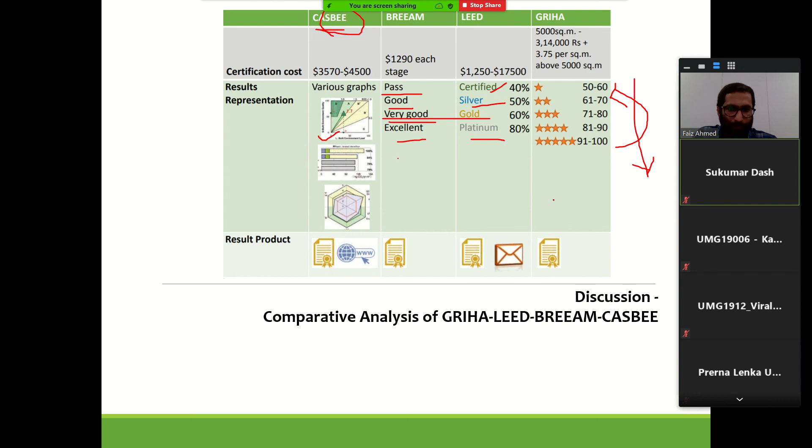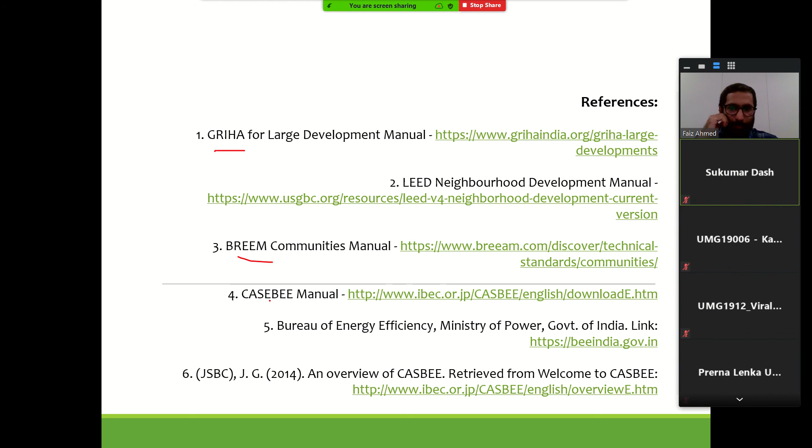This is for buildings, and for large development we said the reverse of it. I have put some reference material here for each. We have seen 4 rating systems, right? GRIHA, BREEAM, CASBEE, LEED.

Most of the discussion is taken from the manuals of these particular rating systems. For more detail and more explicit information, you can go through each of the modules or manuals that are given.

And for case study, I think I have put for the last two - for CASBEE, I have taken from the JSBC, Japan Sustainable Building Consortium.